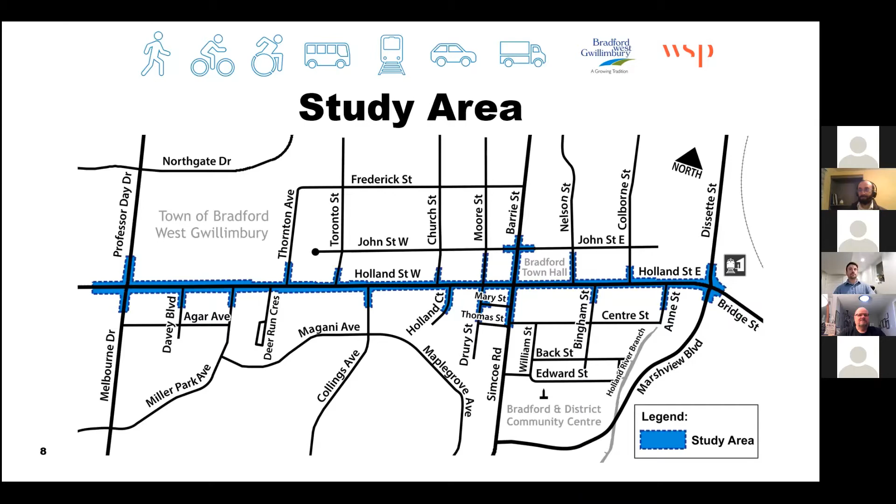There are a few other studies which will have an effect on the town, as well as our environmental assessment study, which I'll review over the next few slides. The town-wide transportation master plan study will develop a guide for sustainable, efficient, and safe movement of goods and people within and around the town. The Holland Street environmental assessment study is being carried out concurrently with the town's transportation master plan. The TMP will inform the Holland Street environmental assessment study by recommending the traffic and active transportation along the Holland Street corridor. The Transportation Master Plan and this municipal class environmental assessment study represent a fully integrated approach to the transportation planning and revitalization of Holland Street. For more information on the Transportation Master Plan, you can visit the town's website at the link below.

The Bradford Bypass is another key project that will affect future traffic on Holland Street. Currently, Holland Street is the only connection for highways 400 and 404 north of Newmarket. The Bradford Bypass, announced by the province, represents an opportunity to shift regional through traffic off Holland Street and to more fully utilize it as an inviting and vibrant downtown core enjoyed by the community. The projected changes to traffic volumes resulting from the Bradford Bypass will be completed as part of the Transportation Master Plan.

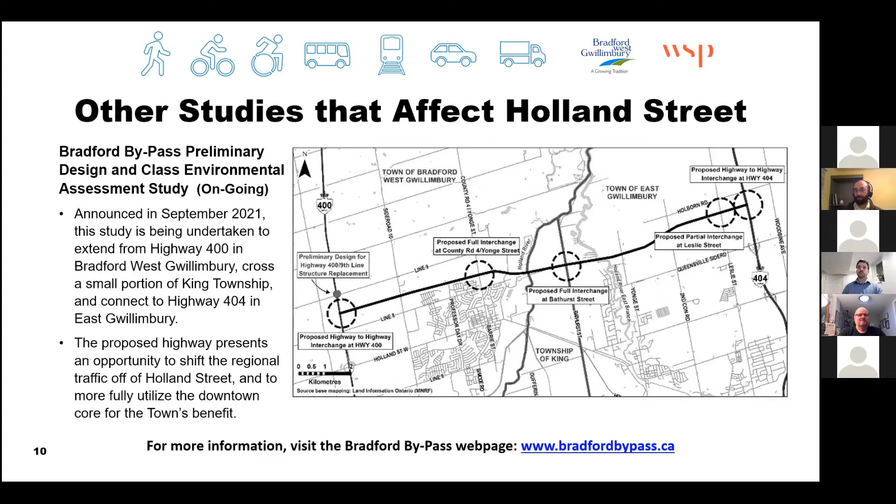The town is also undergoing an official plan review. An official plan provides a vision for future growth and generally guides where new homes, schools, businesses, and parks should be located. It includes policies for construction of new services such as roads and sewers, as well as protecting our natural and built heritage.

The official plan update was adopted by Council in March 2021. It is now with the County of Simcoe, the approval authority for amendments and updates to the town's official plan. The official plan prescribes and directs growth townwide, including within and adjacent to the Holland Street environmental assessment study, which will undergo intensification. Simcoe County is also currently undergoing a municipal comprehensive review to revise the regional official plan.

The regional official plan will plan growth for the county based on the recently released 2021 census data. Following its adoption, the town will revise its official plan to be consistent with the region's. The future growth and intensification outlined in the official plan update are included in the Transportation Master Plan analysis, which again affects the transportation recommendations for Holland Street. The official plan also provides the vision for the corridor, which will guide its character.

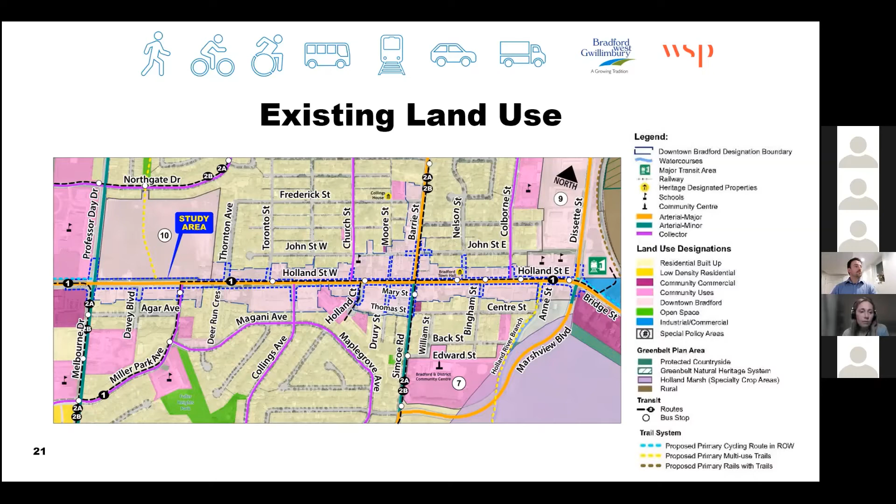This map presents the planned growth in the downtown core of Bradford West Gwillimbury. As you can see, any new development will require buildings to be a minimum of 2 to 4 stories and have a maximum of 4 to 10 stories.

The Holland Street EA study will consider this growth as part of the study, and with the revitalization of Holland Street comes density, which creates opportunities to encourage more multimodal travel in the community.

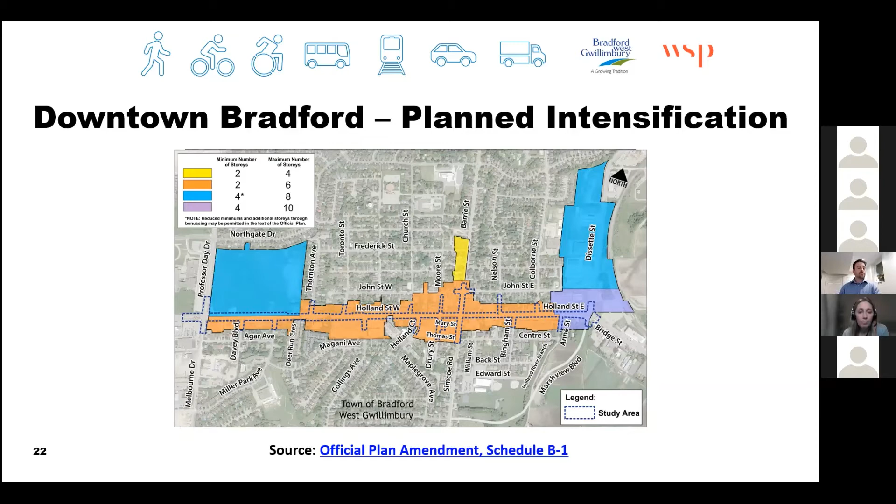The context of the roadway changes as one traverses Holland Street from west to east. The western section of the project is more characteristic of an arterial boulevard, whereas the section east of Holland Court presents the typical characteristics of a downtown area.

This is the view of the existing conditions on Holland Street, east of Collings Avenue. This area would be considered more of an arterial boulevard. There is currently a sidewalk on both sides of the street with lighting and 4 driving lanes ranging in width.

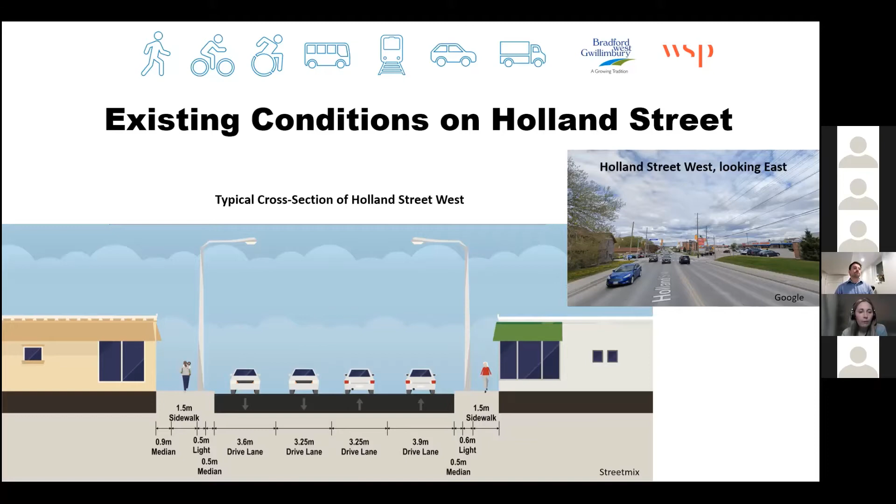This area of Holland Street, east of Barrie Street, would be considered more the typical downtown area when it comes to the cross section. The cross section changes slightly here and includes a slightly wider sidewalk and larger lighting space, with parking lanes on either side of the road and 2 driving lanes.

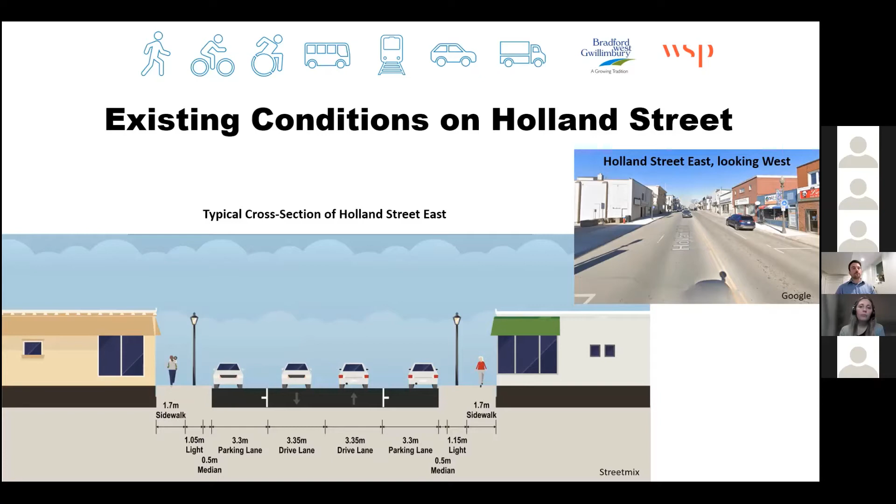This slide focuses on the current available parking along Holland Street. As you can see, there are many opportunities at commercial parking lots along the whole corridor, shown in blue, and some on-street parking along a few intersecting streets shown in yellow.

The on-street parking in pink, as previously shown in the cross-section, has a time limit in the more downtown characteristic area of Holland Street. There are also 5 designated public parking areas surrounding the downtown characteristic area, shown in red on this map.

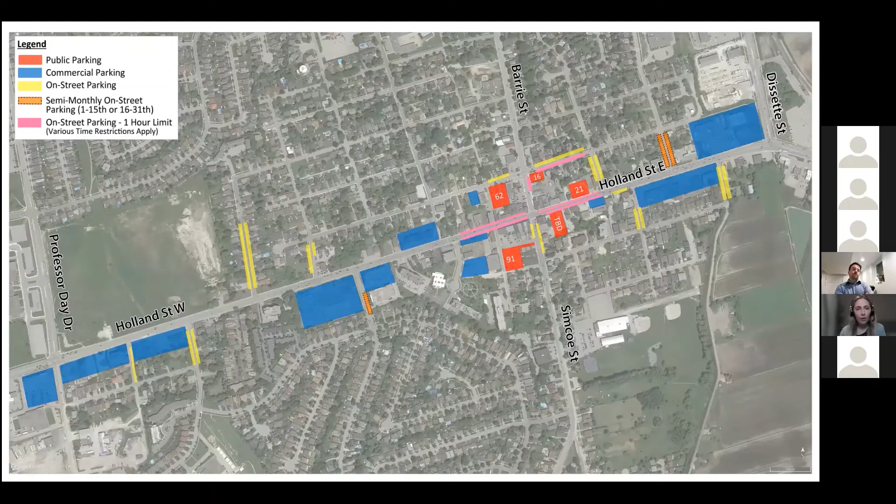Here are some images showing examples of the existing commercial and public parking and on-street parking along and adjacent to Holland Street.

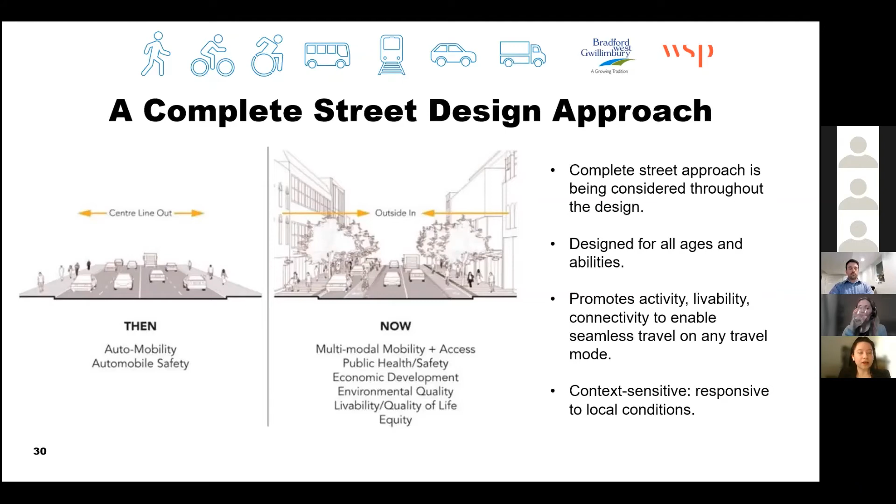Before we move on to the next section to explore the different design components of a road, we want you to think about the following design considerations.

This image was taken in the downtown just west of Simcoe Street. As you can see, this stretch of Holland Street is the narrowest, with a right-of-way width of 20 meters. There will be no opportunity to widen the road in this area. Currently, there are sidewalks on both sides of the street, with restricted parking on the north side during the evenings and mornings.

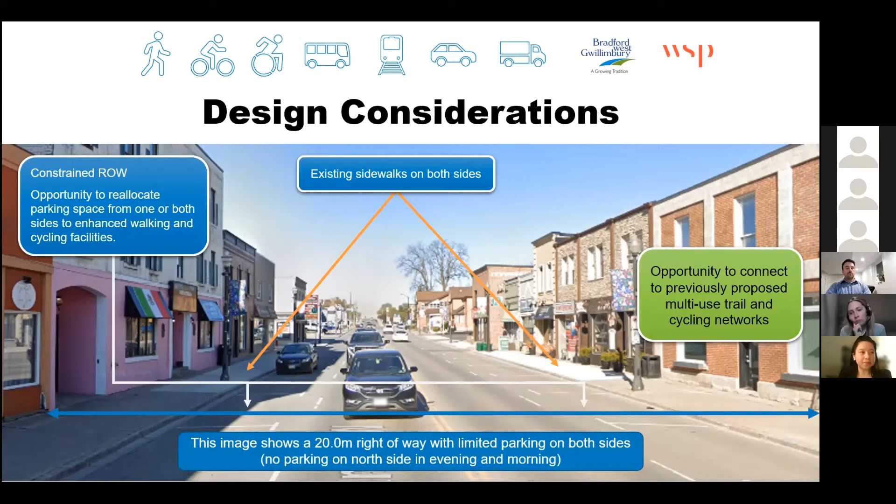And I will pass it up to Jen. Oh, thanks, Olivia. So with those design considerations in mind, we can take a bit of a deeper dive into the different components and zones that make up a street.

Within a typical complete street, there are various zones from one side of the street to the other, as shown in this image. Starting from the center of the road, we typically find the travel lane zone for vehicles. Adjacent to the travel lane is often a street parking zone. Together, the travel lane and the parking zone form the roadway, or the area dedicated to cars.

Moving away from the center of the street is a cycling zone. When the cycling zone is located on the roadway, it's often delineated from the vehicular zone as a painted, buffered bike lane. Sometimes, when the road is wide enough, the cycling facilities may be elevated and separated from traffic for increased safety and better enjoyment of the street by both drivers and cyclists.

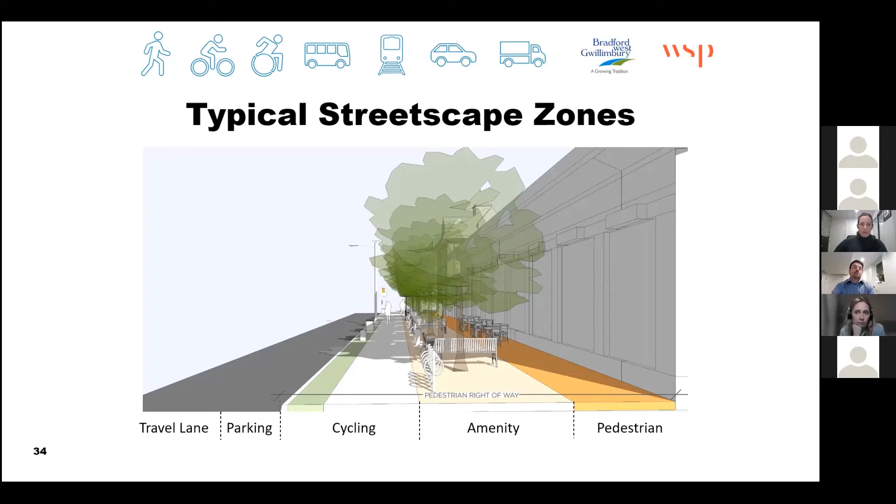As we move towards the edge of the street, we find the pedestrian zone, where you'll typically have sidewalks, and an amenity zone, which may contain a multitude of things, including patios, plantings, art, and furnishings. As we looked at in the design consideration slides, it's important to remember that we have a constrained width along Holland Street. All of these zones won't fit, and we want to understand what zones are most important to you.

Let's look a little deeper into the vehicular zone, or the travel lane zone. These are some typical examples of travel lanes in the parking zone. It's worth keeping in mind that a typical travel lane is about 3.5 meters wide, and parking usually occupies about 2.5 meters. To put that into perspective for Holland Street, where segments are only 20 meters wide, with 2 travel lanes in each direction, 70% of the available space in the public right-of-way is going to be used up.

If you add parking on both sides, another 25% of the roadway would be used. This only leaves 5%, or 1 meter, of space for any other type of zone. This obviously is not an ideal scenario. It wouldn't leave enough space for a single sidewalk. As such, redistributing roadway features to the cycling zone, the amenity zone, or pedestrian zone will be considered in this study.

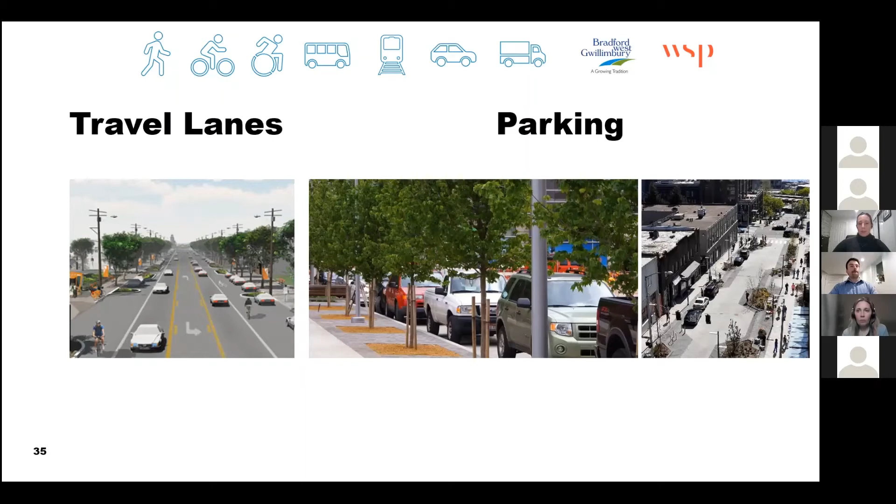Let's explore the pedestrian and cycling zones further. Cycling facilities can be located either on road as cycling lanes next to the travel lanes or parking, or be elevated and separated from the road and adjacent to pedestrian and amenity areas.

When located on street, the cycling lanes often include a painted or physical buffer for cyclist safety. Each on-street cycling lane with buffer typically occupies 2.5 meters. The pedestrian zones or sidewalks will vary from a minimum of 1.5 meters to 3 or more meters wide, depending on the volume of foot traffic anticipated.

This means that together, the cycling lanes and narrow sidewalks on both sides of the corridor would take up 40% of the street width, leaving space for 2 travel lanes, 1 in each direction, and an additional 2.5 meters of amenity zone space on both sides in the narrowest sections of Holland Street.

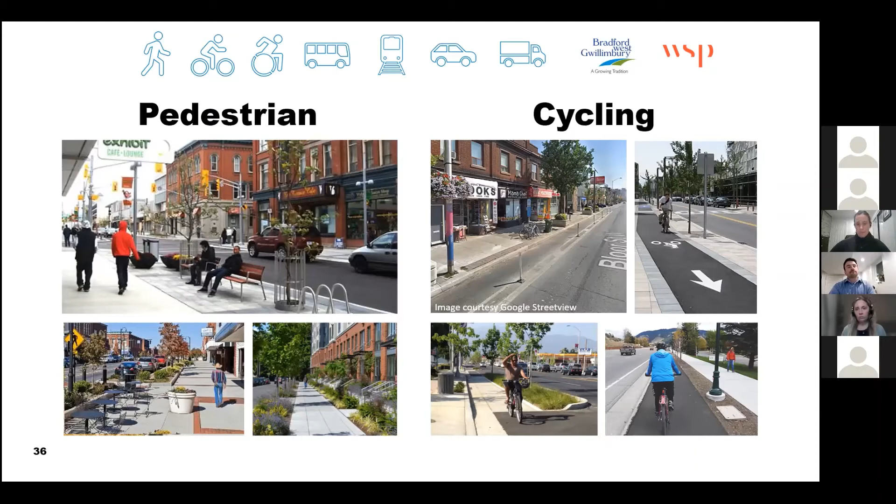The amenity zones are flexible spaces that help create character, beautify the street, and provide enjoyment to those who visit and travel through the corridor. These spaces contribute to a vibrant public realm and invite us to stay and enjoy the space.

Amenity zones are the most flexible spaces, both in terms of the area they take up and what they can hold. They range anywhere from 1 to 5 meters wide or more.

As shown in this slide, amenities in these zones may include patios and movable seating from nearby restaurants, or they may have decorative street trees, grasses, perennials, or even bioswales to assist in controlling the quantity and quality of stormwater runoff. The larger the amenity zone, the more possibility there is to incorporate a multitude of different elements.

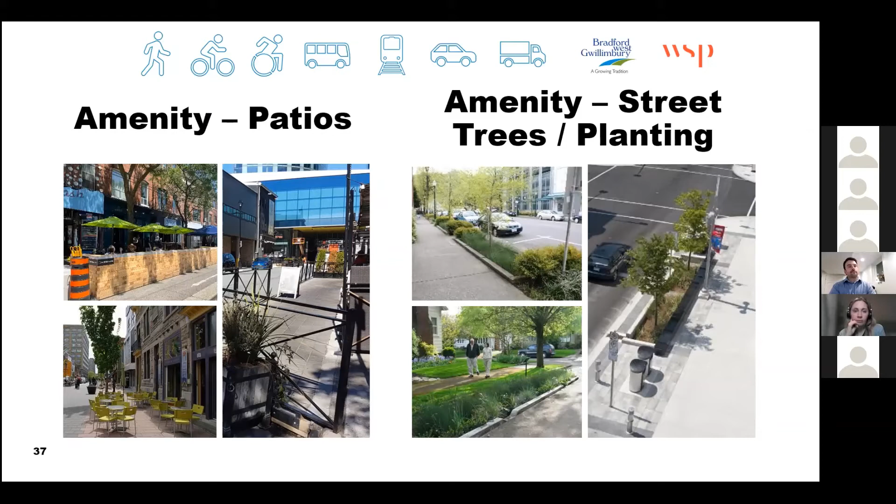On the next slide, you'll see there are some typical examples of furnishings within the amenity zone. This may include seating, bike racks, and waste receptacles. Other types of furnishing within these zones may also include utility features, such as street lighting.

Shown here are examples of illumination within the amenity zone. Pedestrian lighting helps to foster a more intimate pedestrian environment, while also helping to create a safer corridor at night.

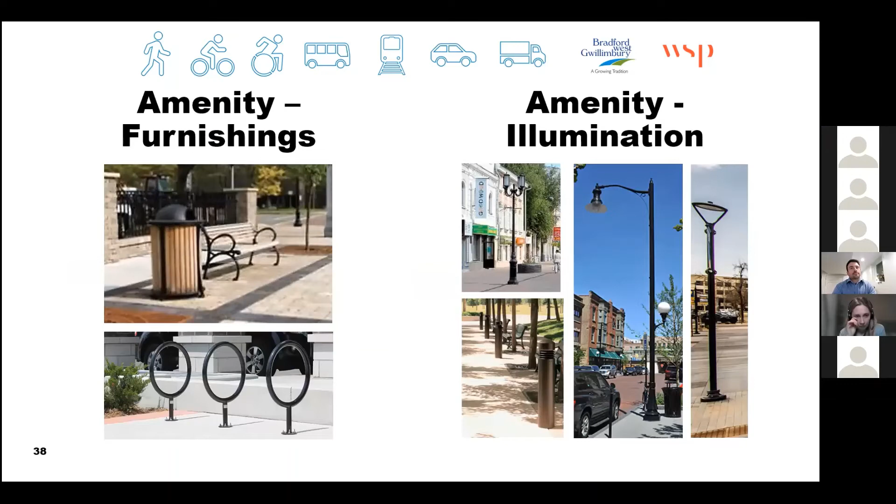With that, I'll hand it off to Marcio with next steps.